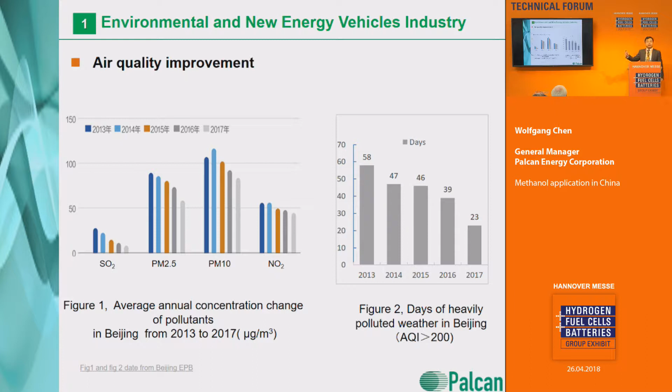And in 4 years, what happened? In 4 years, you could see very clearly the particles, the pollution, are going down. And the beautiful days are more, but pollution days are dropping. It's very significant. What happened? In Peking, there's a lot of traffic. In the past, there were a lot of plants.

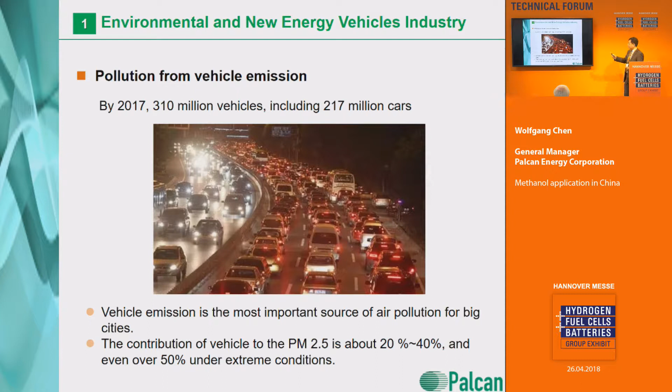But now we analyzed that the traffic contributes the pollution. So how to reduce the pollution, how to resolve the problem, is clear. We had a lot of new energy cars. New energy car means less diesel, less gasoline, more electrical, and in the future, more fuel cell. So you could see the amount of electrical vehicles last year was 777,000 pieces. It's more than USA. So in China, now there are most new energy cars.

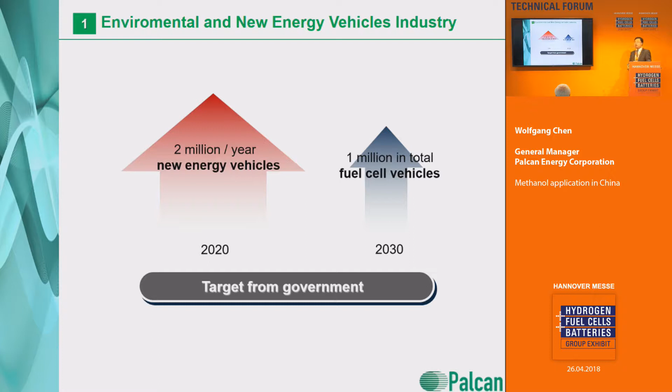But the target for the government is even more. You could see 2020, there will be in 1 year 2 million electrical cars built. This is double the target of Germany 2020. And this is even exciting. In 2030, there should be 1 million fuel cell cars.

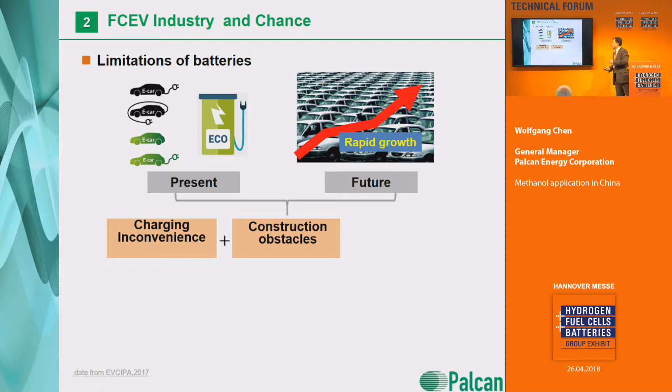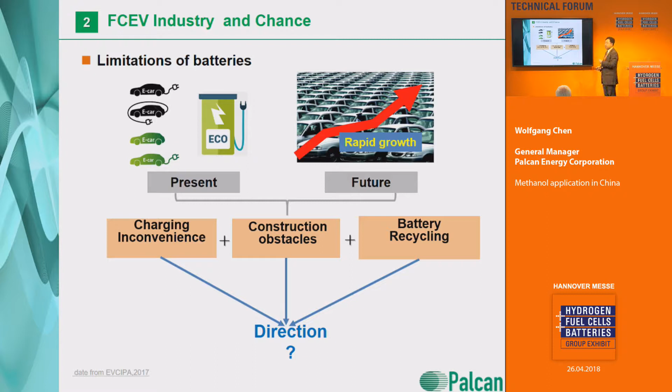So you could see a lot of cars, but there is not enough charge stations. The construction of charge stations and the battery recycling makes a long-term or potential trouble. So what's the result? What's the direction? It's very clearly hydrogen fuel cell. So this is the logic. Everybody here making fuel cells will be very confident that fuel cell will come in China. Actually, it's coming, but don't worry, it will not boom. It will be even better.

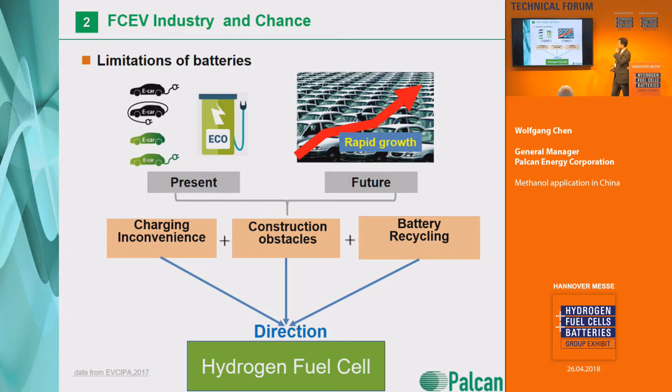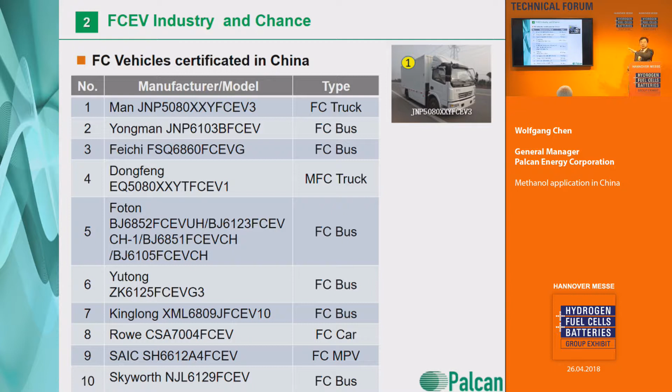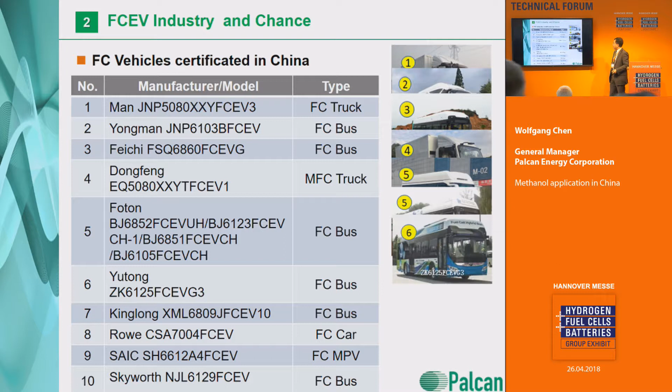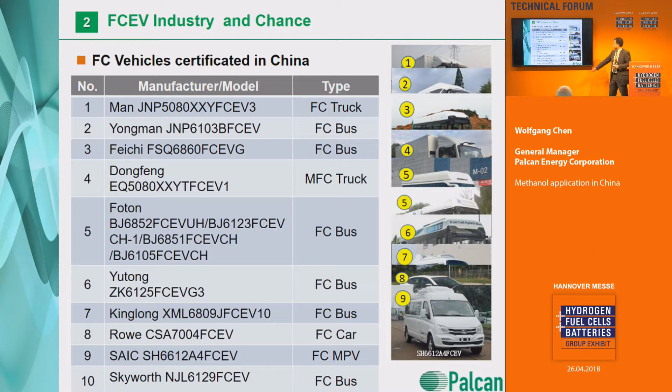So for fuel cell, we could see there's a lot of fuel cell vehicles. It's not so beautiful like displayed here, but it runs in the street. You could see the bus with special design, bus with a hydrogen tank above, truck, short bus, another bus, personal car from SAIC. It's also 700 bar tank, also a fuel cell car. And this is a Sprinter size, 6 meter, also a fuel cell. So in China, there's already different vehicles, and it will be more and more.

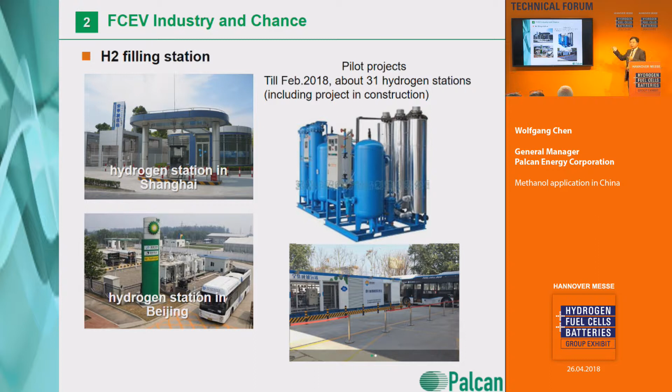So how about the fueling station? Everybody knows that the fueling station takes time. Fuel stations need a safety check, need regulations. But in China, there are fueling stations, and more and more will come. About 31 fueling stations are in construction. So the industry will be excited with Chinese fuel cell requirements and fuel cell development.

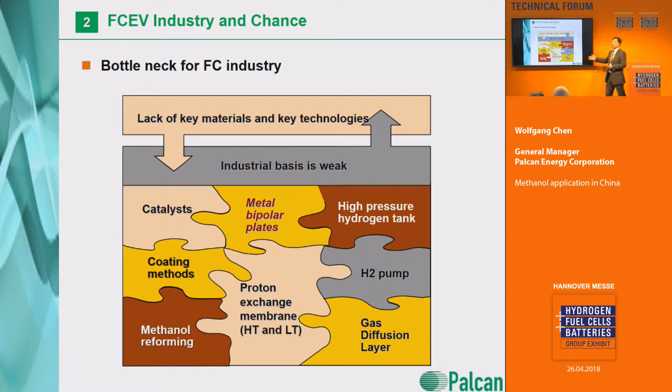But fuel cell is not so easy, because we still need a lot of elements, starting with catalyst, GDL, pump, membrane, everything. It was only research. There are no companies in China who worked a long time on the product. So now is the chance for everybody who spent a long time and a lot of money on fuel cells. Almost everybody could find the chance in China. China needs the technology, the material, the product. So this is the chance.

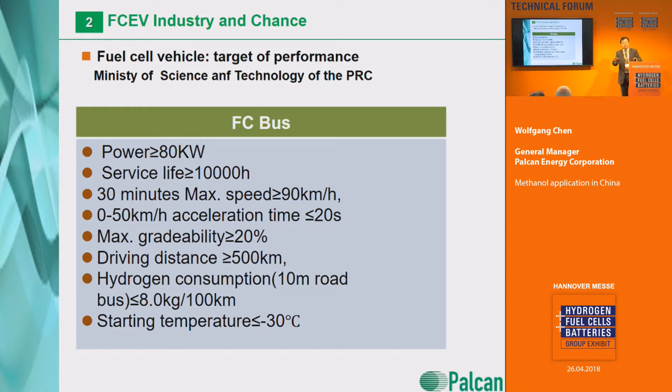So the Ministry of Science and Technology in China has 4 big projects, based on 2 lines. One is pure fuel cell. Later you will see another one is hybrid as range extender. So you could see the target. For FC bus, the power is only 80 kilowatt. The requirement is only 30 minutes at the maximum speed. And all other things, 8 kilogram, it's not so difficult to reach. If you have the technology and the experience, go to China. You will find your market.

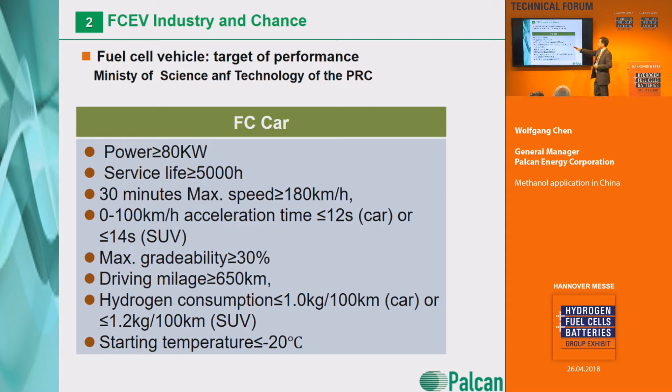Here is the FC car. Again, only 80 kilowatt. Remember, 3 years ago, when I talked here about fuel cell, I told people, please prepare some fuel cell stack, 30 kilowatt is enough. Then 1 year later came the regulation, 30 kilowatt. So now, pay attention. The next inquiry, which will make you crazy, is 80 kilowatt, because this is for the pure fuel cell.

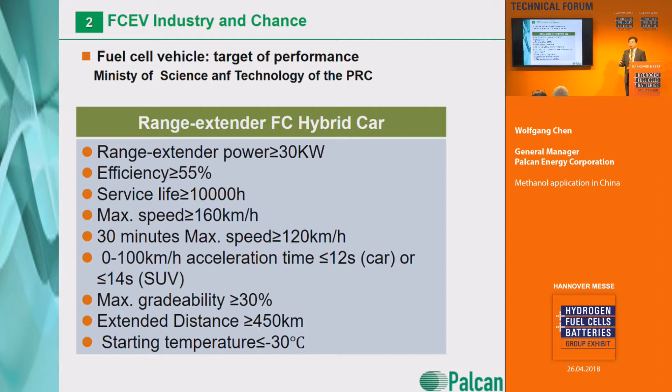Then here, you could see range extender. Range extender is only 30 kilowatt. So now there are crazy inquiries, 30 kilowatt in China, for air blower, humidifier, stacks, everything. So FC hybrid car, range extender, and be careful here, minus 30 degrees. The Chinese are now crazy with minus 30. So if somebody has strength in low temperature, there will be a good chance. This is another 50. So 30, 50, 80. This is for the Chinese fuel cell.

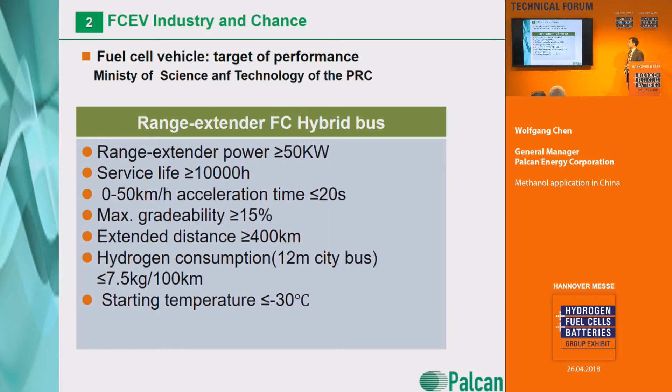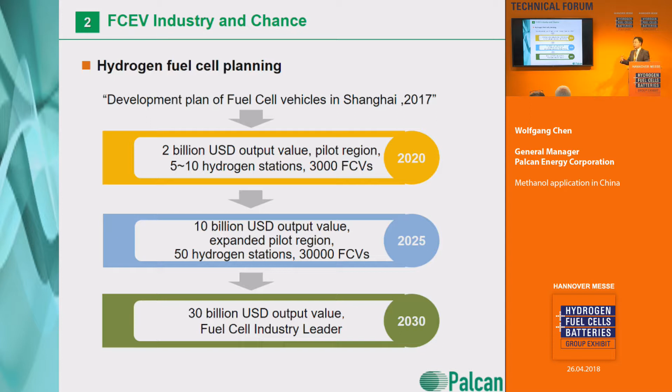So I would like to say fuel cell in China has a lot of opportunity. Not only the market, but also the investment. The total funds which are announced for investment in fuel cell is more than 130 billion Chinese yuan, around 20 billion US dollars. So it's a good chance for people to go to China to have fuel cell business.

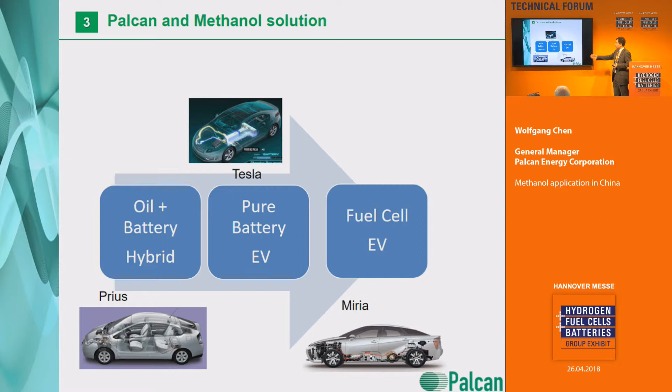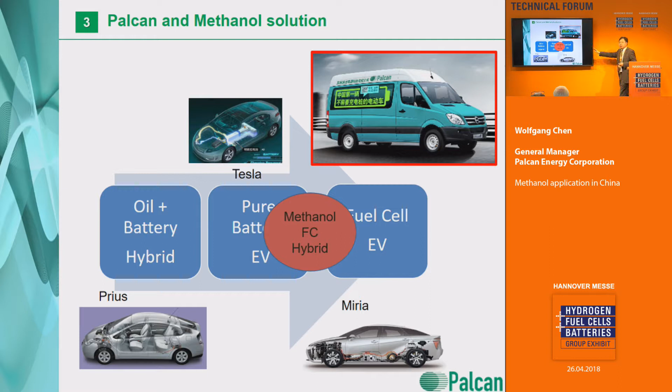So generally, from hybrid, pure electric, fuel cell, and then hybrid. We make methanol, because methanol in China also has a good chance. You could see methanol is a liquid. It could be directly burned, 100%, or mixed with gasoline. If they make DME, then it's mixed with diesel. Still, we could use its electrochemical performance. We could make DMFC for small size fuel cells, and we could also make reforming together with fuel cells.

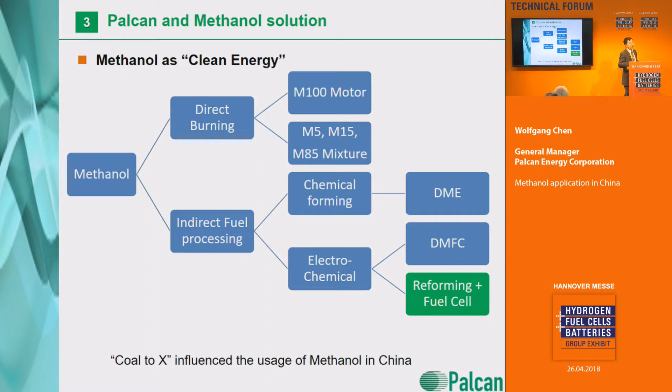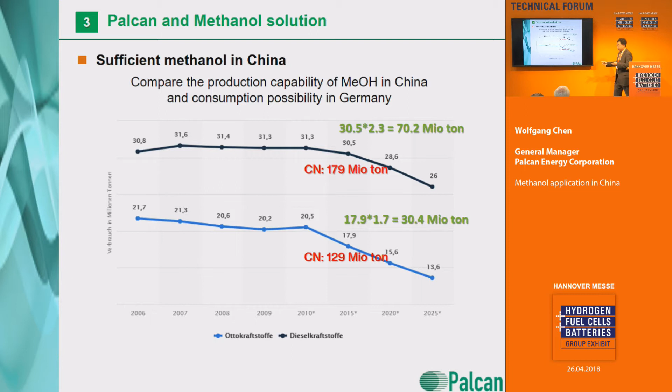To make it clear, I make a comparison. This is German consumption for diesel and for gasoline. You could see the total German consumption for diesel. We take the factor 2.3 because to replace diesel, 1 liter of diesel is about 2.3 liters of methanol. 1 liter of gasoline is around 1.7 liters of methanol. So you could see this is 70 million, and here we have 71 million tons, which means if you take the capacity of Chinese methanol, you could use this capacity for the whole of Germany to replace diesel. So that's the reason why China, this 1/3 capacity, they need a technology, they need a product to help the country be green.

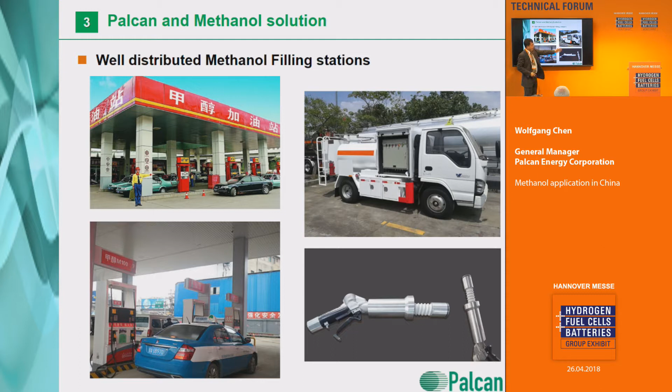So this is the fueling station. You could see this is the transport vehicle to deliver methanol. This is the taxis with methanol. This is the fueling. Even more, this is amazing. Here, a bottle, like a water bottle, is delivered for hot pot, for cooking. Using this methanol is cheaper than natural gas. It's easier. You could also use methanol for heating at home. So in China, methanol is everywhere, and the price is attractive. It's cheap. So people have motivation. There is already infrastructure. There are already channels to get methanol.

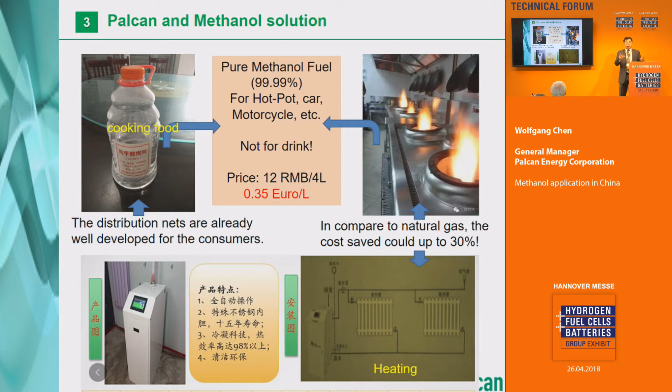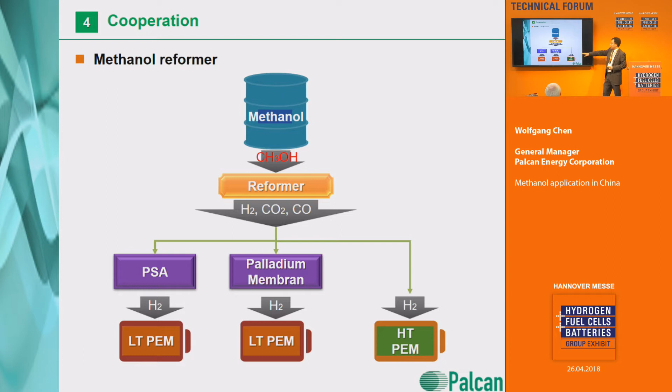And with methanol, how to combine with PEM, with the hydrogen, with the fuel cell, which we understood. This is a different way, with PSA to purify, with palladium to purify this to 100% or 99.99% hydrogen, or you do nothing. And in the middle, you have water gas shift and PROX, you have Selox, you have methanation. This is CO2 inside. Here is pure hydrogen or CO inside without any pre-purification. So there are many different ways to combine methanol and fuel cells.

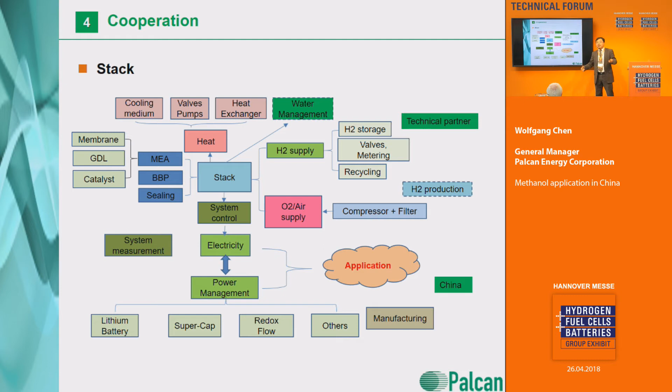And again, there are a lot of things from the stack. You need membrane, catalyst, bipolar plate, sealing, supply, everything. Important is, here is China for application, and here, you are technical partners. You could help us to realize it in the application. So, good chance. What we are focusing on is small bus, delivery truck, telecom, and stationary generator. So this is the big market.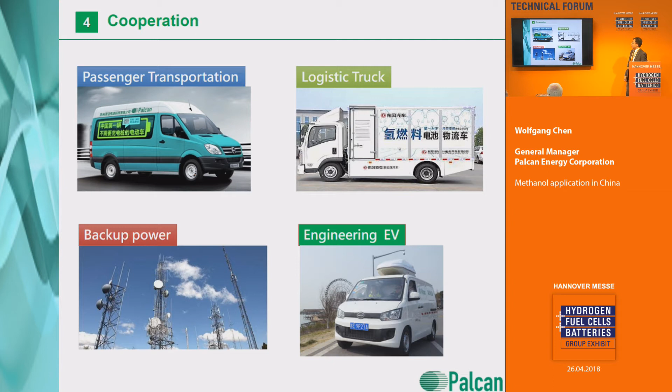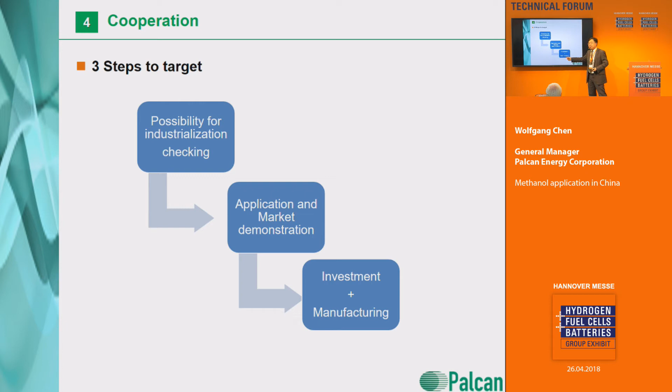And to summarize my presentation, I would like to say going to China is easy. We are here. Palcan has been here for 4 years to help you, firstly, to analyze your product, your technology. And then we will help you get the product demonstrated. And next step, we help you find investment. We help you manufacture. So this is the service. This is what Palcan is doing. Thank you.

Thank you very much, Mr. Chen. Are there any questions from our audience at this time? All right, give it some thought. I noticed you mentioned that China's expecting 2 million electric vehicles by the year 2020. So at this point, that's only 2 years away. Do you think that's a realistic goal, or is that a little bit ambitious?

We make a small calculation. 2 years ago it was 500,000. Last year it was about 777,000. So we make the calculation. We add each year 50% or 70% increase. It's easy to get 2 million. It's easy. Okay. All right. Well, I guess we'll meet back here in 2020, see how it's going.